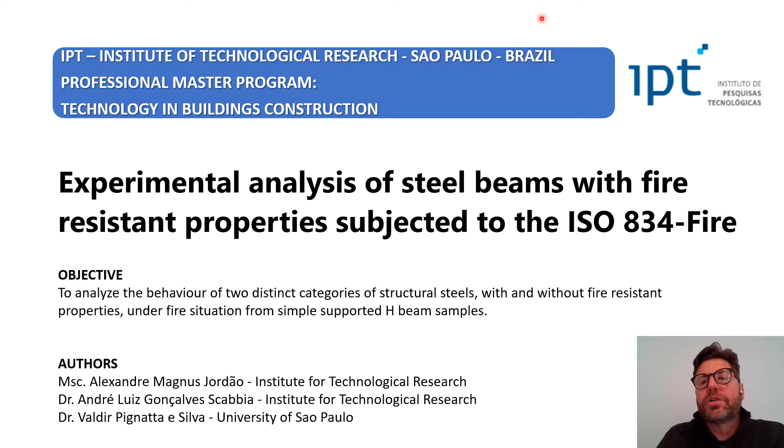The focus of this research is the development of a new steel alloy with fire-resistant properties using niobium and molybdenum working together in synergy. So what I'm going to present today is the partial results from the first test in a pair of steel beams with different compositions, one a conventional carbon manganese steel and the other a fire-resistant steel.

So these are two different views of the IPT horizontal gas furnace modified to run the tests of simply supported steel beams, which were loaded by means of two concentrated loads applied by a jack through a reaction loading against a moment frame steel structure.

Thermocouples were installed in three different sections of the samples, and also inside the furnace atmosphere near the samples. In order to not allow the heat to escape and let the beams bend freely during the loading, three precast concrete slabs were installed above the top flanges.

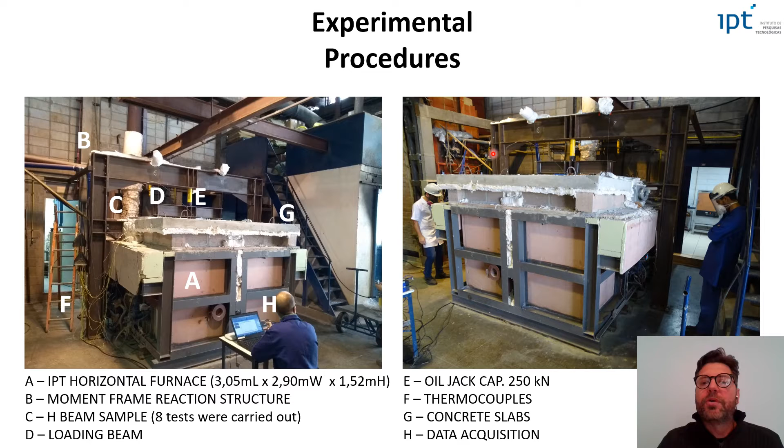As I explained, two different steels with different chemical compositions were used, allowing us to compare the behavior of both steels under the same thermomechanical loading situation. The fire-resistant steel beams were produced in Japan according to the JIS SM490A-FR Japanese standard, here named JP1, and the conventional steel was produced in Brazil according to the ASTM A572 grade 50 North American standard, here named BR1.

What is important to tell here is that the most important difference in terms of chemical composition between those two steels was the massive presence of molybdenum in the fire-resistant steel.

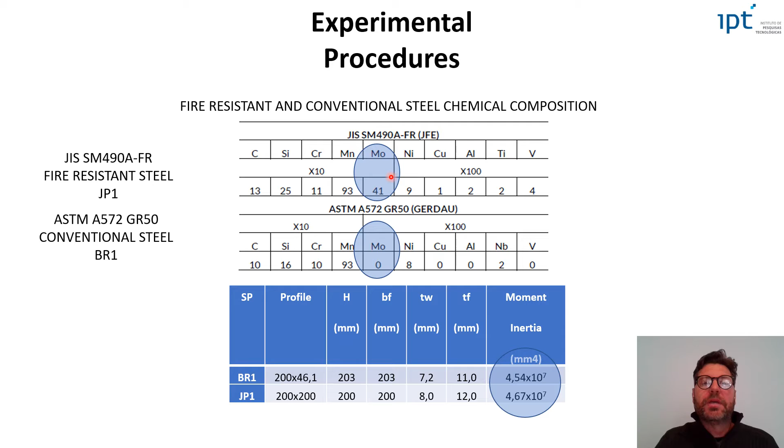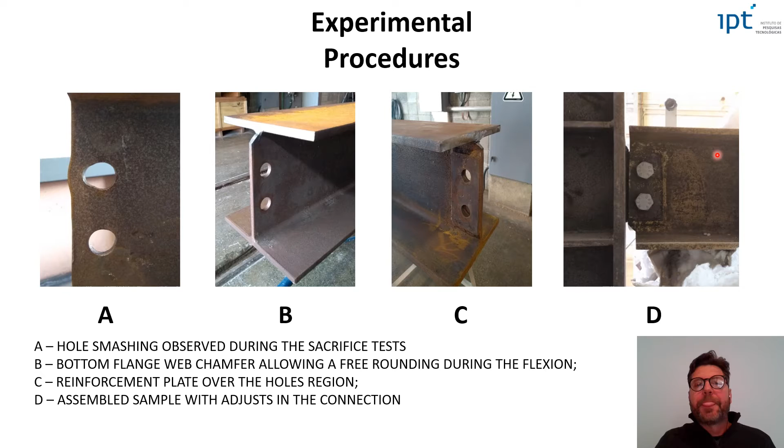Well, before running the tests themselves, we did two sacrifice tests to see how the furnace and the beams would behave, and it was observed that some limit states were reached in the connection part of the structure. By the way, it is important to say that the behavior of the connection was not the focus of this research. So for the official tests, we provided reinforcements on the web, as you can see here, and a small chamfer at the bottom flange to allow free rotation during the bending. And we did it to all 8 samples.

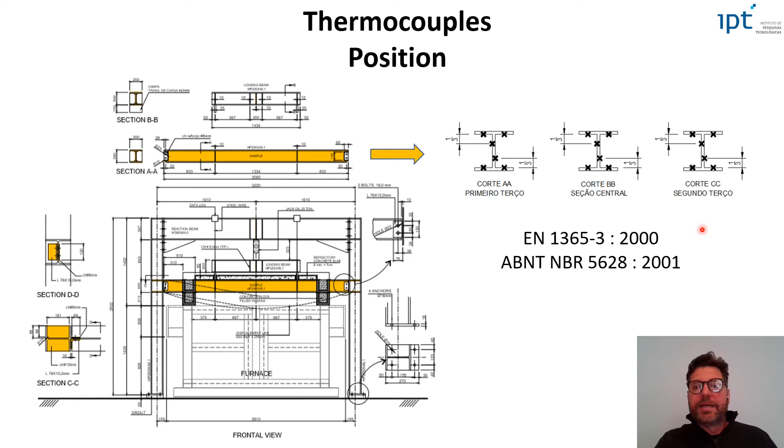This is a drawing of the system built for the tests and the position of the thermocouples over the samples. The criteria of both European and Brazilian standards for tests were met. From this slide on, I will present the results of the first pair of samples.

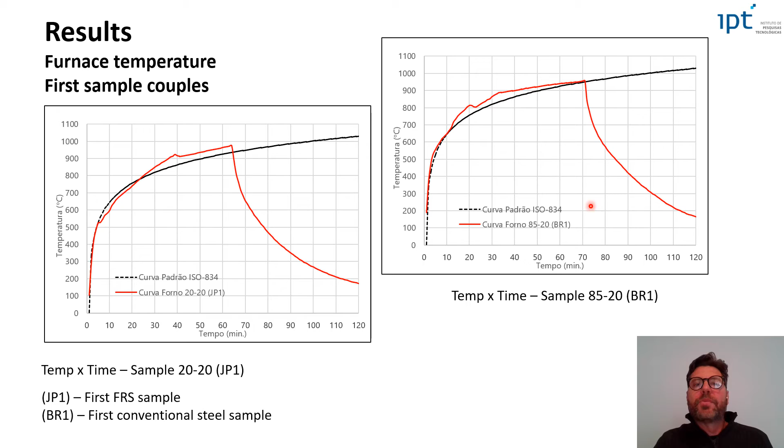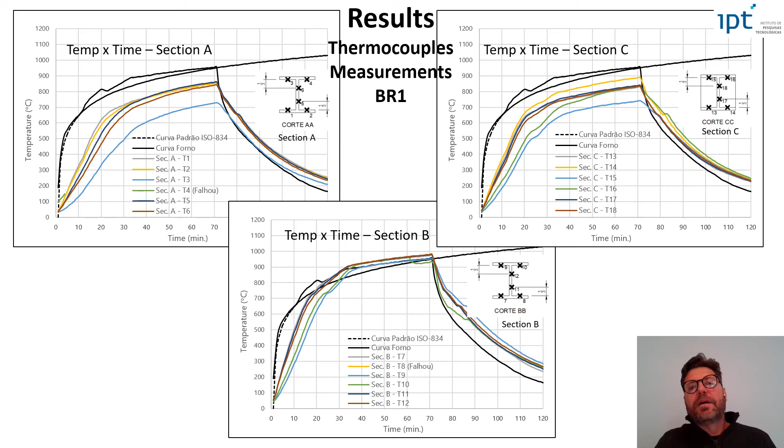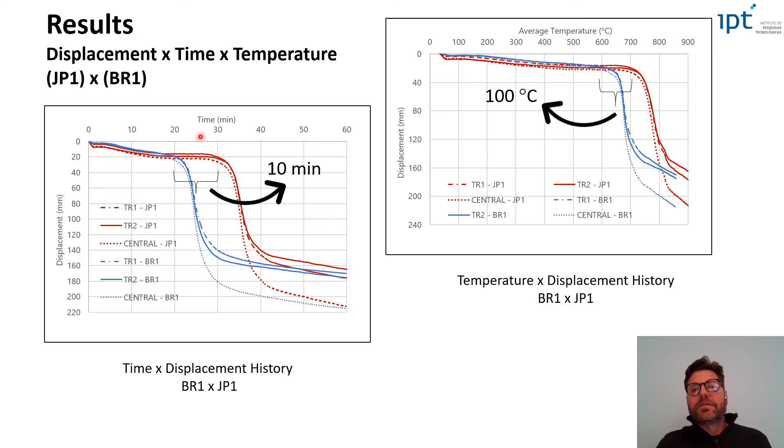And what we saw is that the same curve shape was seen for the other pairs of samples. Here we can see the absolute displacement values for both steels at the temperature range 400 degrees to 800 degrees, with the biggest difference occurring around 700 degrees.

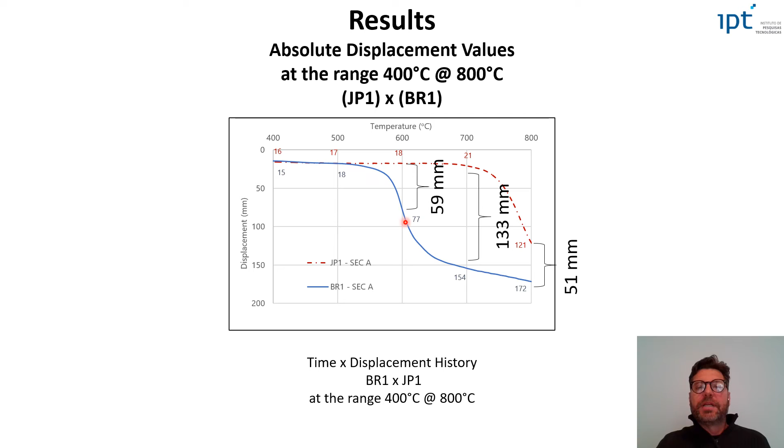Again, the red curve stands for the JP1 sample, and the blue curve stands for the BR1 samples, JP1 being the Japanese fire-resistant steel sample, and BR1 the Brazilian conventional steel sample.

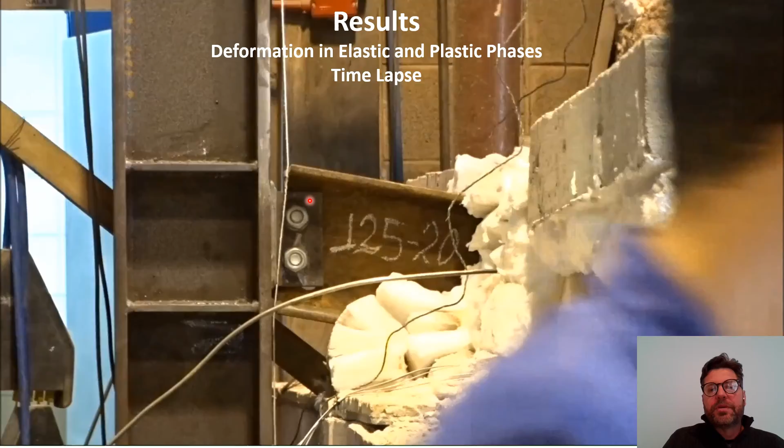This is a quick time-lapse recording of one of our tests. Here you can see the plastic deformation of the beam and the behavior of the connections.

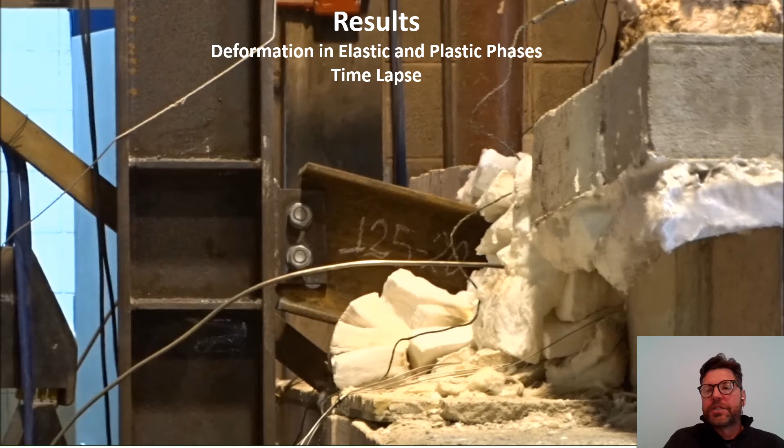As I said, another 6 tests, or 3 more pairs of beams with different steels, were carried out, but with slight changes in the mechanical loadings. What we saw for the other tests is the same curve shape, but with different magnitudes. Here you can see the 1, 2, 3, 4 pairs of samples, being a fire-resistant steel and a conventional steel for each pair.

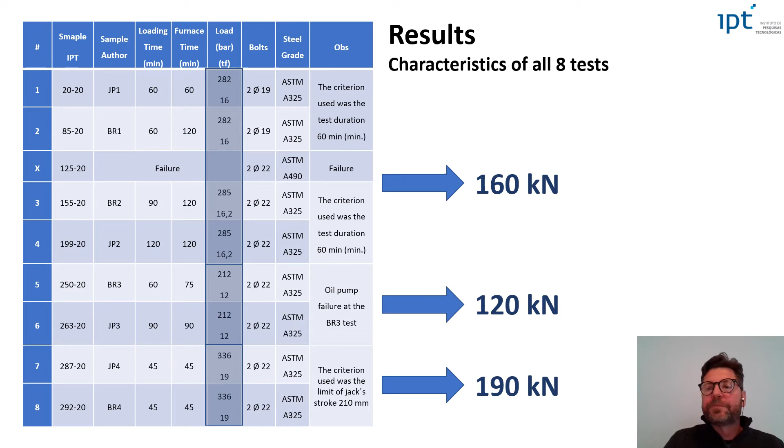Some points were discussed before the conclusions, based on the results showing the beginning of the plastic deformation in millimeters and in Celsius degrees. As we can see, the other tests show different numbers, but always demonstrate the same ability to reach the plastic deformation when using fire-resistant steel.

For the discussions, plastic deformations occurred at different times and temperatures between different steel grades. Differences in absolute displacement values could be seen in the range 400 degrees to 800 degrees between different steel grades. Significant differences in the behavior of such different steels were not noticed at temperatures above 800 degrees. And the displacement versus time and displacement versus temperature curve shapes remained the same under different loading intensities.

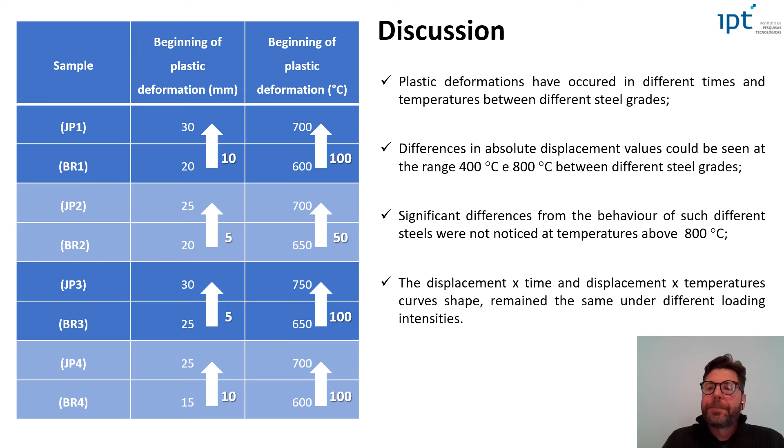Fire-resistant steels had better performance compared with the conventional steels when exposed to the same thermomechanical loading conditions. This enhanced performance seems to be more effective in the temperature range 400 degrees to 800 degrees. Below and above this range, both steels behave the same way.

It is possible to obtain different critical temperatures, or temperatures that must not be exceeded by the structural element under fire situation, for both fire-resistant and conventional steels. That will result in the reduction of the protection material thickness for the fire-resistant steels compared to the conventional.